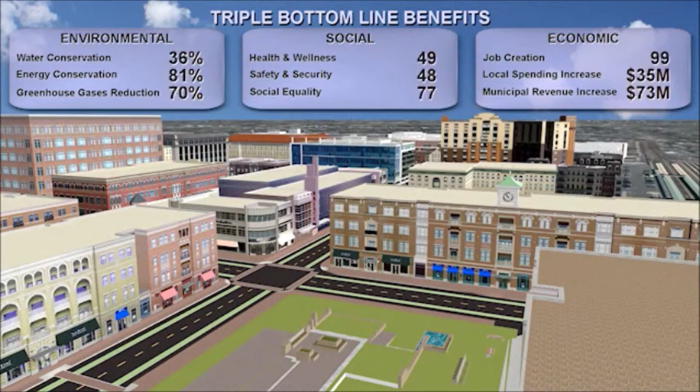I think this tool has the potential to remake the entire industry in a very profound way. So I think this is a fantastic start. We're very much on our way.

Thank you, Gerhard. And now a few words from Louis Giacalone from H2M, one of the leading architectural and engineering firms in the tri-state area, on his assessment of this tool.

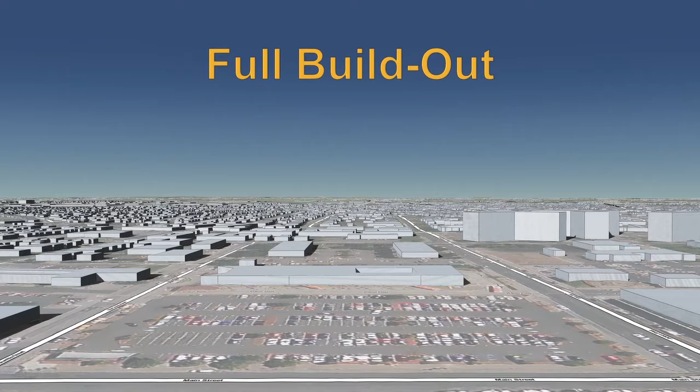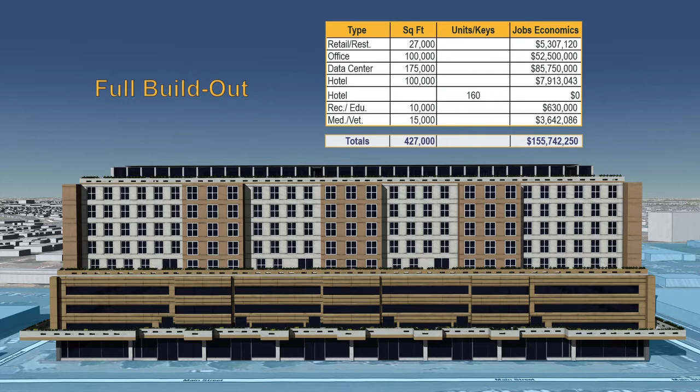My name is Louis Giacalone, registered architect with over 50 years in the profession. As Deputy Marketing Director at H2M, a firm of over 500 architects, planners, and engineers, I constantly face community and municipal resistance to preparation and presentation of major urban projects.

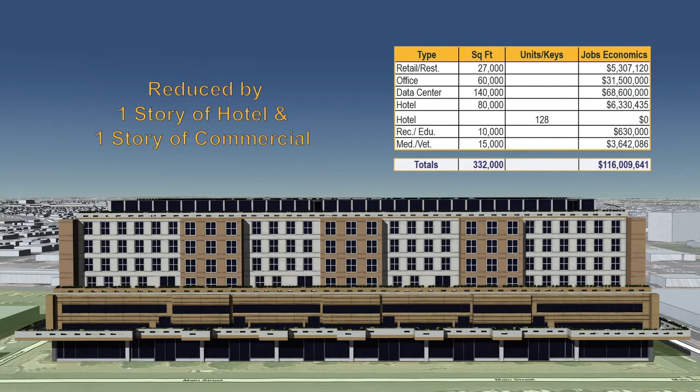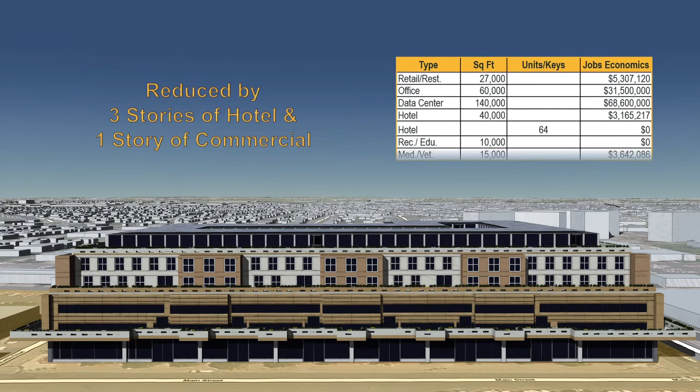Although we can demonstrate the project benefits to the community, it is often difficult to respond to comments and questions without doing further analysis and having multiple presentations. With the V&A tool, we will be able to demonstrate at presentations a real-time analysis of the economic, social, and environmental benefits of complex projects. This tool will be a game changer for developers, for municipalities, and planners.

And now, for those of you that would like to get into the more technical aspects of our V&A tool, Kevin DeVito of Renaissance V&A Technologies will take you on a much deeper dive of this game-changing tool.

The V&A tool is a combination of software, 3D modeling, and domain knowledge that serves the purpose of moving planning and design approvals, concepts, and implementation forward in urban environments, especially urban renewal. The reason why we're successful with this methodology is that we bring together domain knowledge, software, 3D modeling, and big data.

And the proof is a recent win that we had using the software as part of our presentation, an element of our presentation for the Carousel Mall redevelopment project.

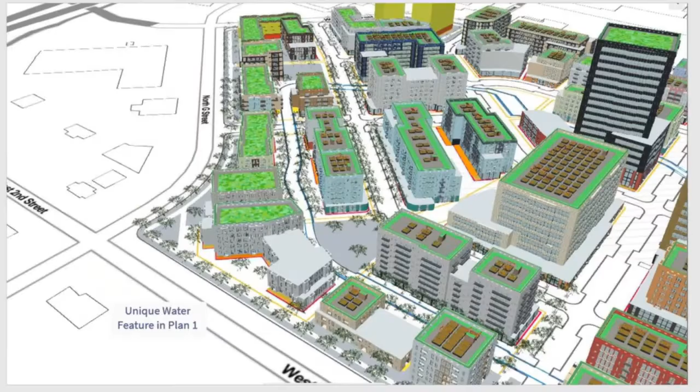So this is sort of a stunning visualization of the way architects approach urban renewal visually. And what we want to do is provide that type of visualization that's familiar and effective in terms of our planning designs.

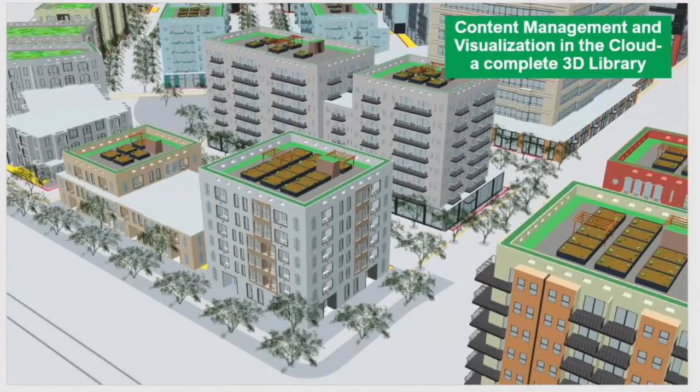But the unique aspect of this is it can be changed on the fly. It's a real three-dimensional environment, not a screenshot or a video. It's the actual 3D models themselves that carry with them intelligence and information on the impact they have on the urban landscape, including economic, social, and environmental.

The purpose of the tool, again, is to provide the economic impact of the designs and then create an iterative process that allows for changes to be made on those designs and then visually presented in an accelerated way.

So it's not meeting every week or every other week. It's literally turning things around in the meetings themselves, within an hour or two hours. This is a per building analysis, one of our examples.

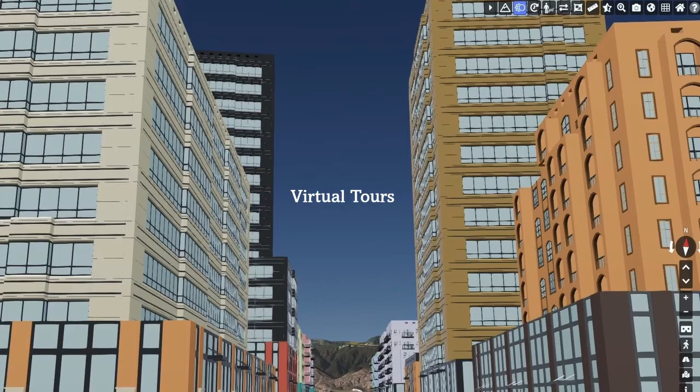As you can see, the building has certain use types: office, data, hotel, and so on, and the impact of the jobs that it creates in the economics in a general way. And of course, because we're 3D visualization, we can do virtual tours and bring in GIS data that allows other information, city information, and other data to be deployed so it can all be visualized.

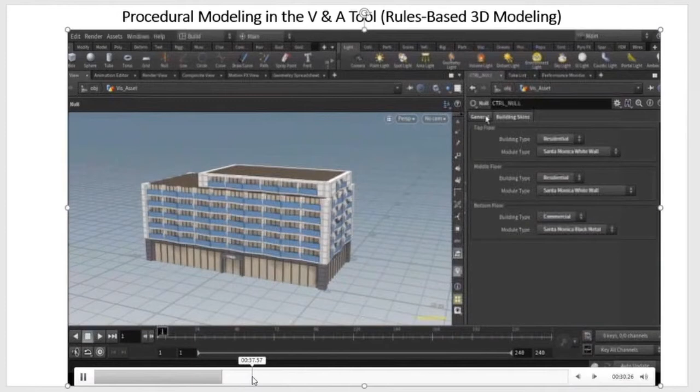Taking a deeper dive into the 3D modeling work we do, we use side effects software and procedural modeling to design our buildings and create scripts that allow for different types of buildings to be modeled and then delivered to our visualization system. Those criteria are based on economics, building types, the square footage of the area, and the overall plan.

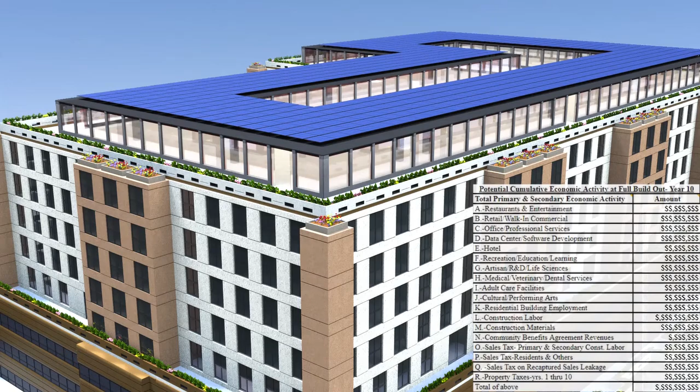Ultimately, what we're going for is what you see here, which is real-time data being deployed as we're making real-time changes in the buildings themselves.

Our goal is that we have a funding objective that we can discuss at a later time, and the use of those proceeds is to expand our platform from version 1 to version 2, expanding our library, our cloud backend, and for general working capital.

Who are we targeting? We're targeting really a new generation of urban developers and planners, the ones that are thinking out of the box and looking at a broader approach to urban design. Sometimes these individuals need to push the cities who have their own objectives, so what we try to do is provide a balance of information and visualization, and also our philosophy to satisfy this marketplace we're working in.

Our 3D modeling apps include Houdini Engine, Nextbase, AutoCAD, and other modeling software. So we use best-in-breed modeling tools to deploy.

Our analysis is built on traditional spreadsheets and analytics, but what we do that's unique is that we balance out environmental, social, and economic impacts, and then show the visualization as it relates to that.

Building for urban nodes, again, just to summarize, is a combination of content management and visualization software, 3D modeling, utilizing external data, big data, external APIs, and then building out that data for the city.

So the current status of the project is using Cesium, Nextbase, and Esri software as part of our platform tools, and our data creation is basically based on a number of different software tools: SketchUp, SideEffects, ArcGIS, and so on, and also data from cities.